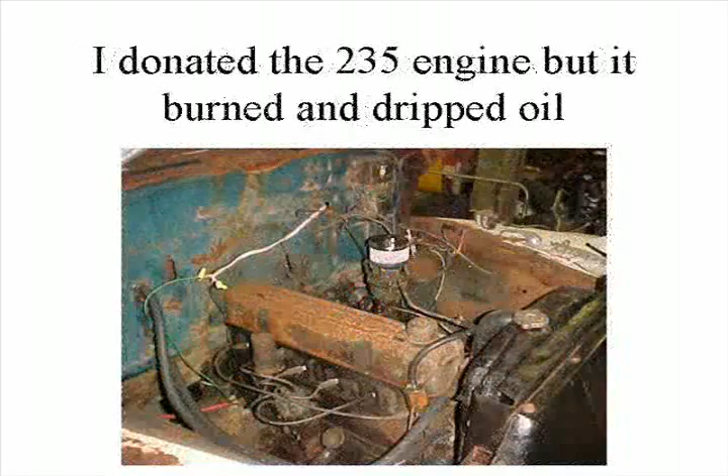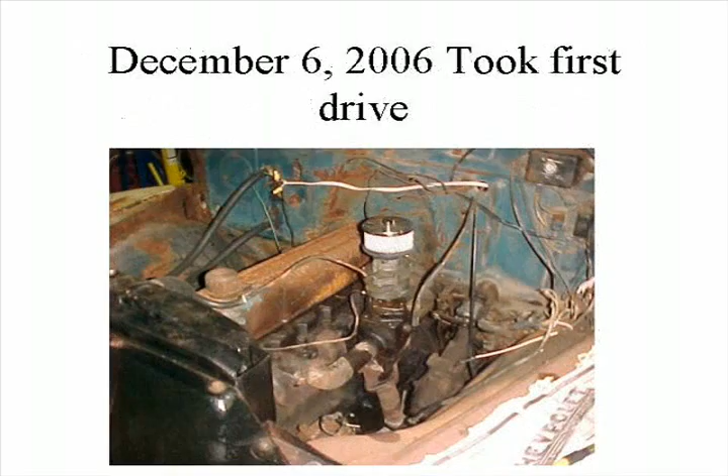This was about May of 2006 when we got started on this thing. We got it and dragged it home and started looking at it, and we found a whole lot of things wrong with it.

First thing we tried to do was get the hood up, but the hinges were rusted. Had to unbolt the hood hinges to get the hood off because they wouldn't open up. Anyways, got in there and found the engine was locked up, and that was a terrible mess.

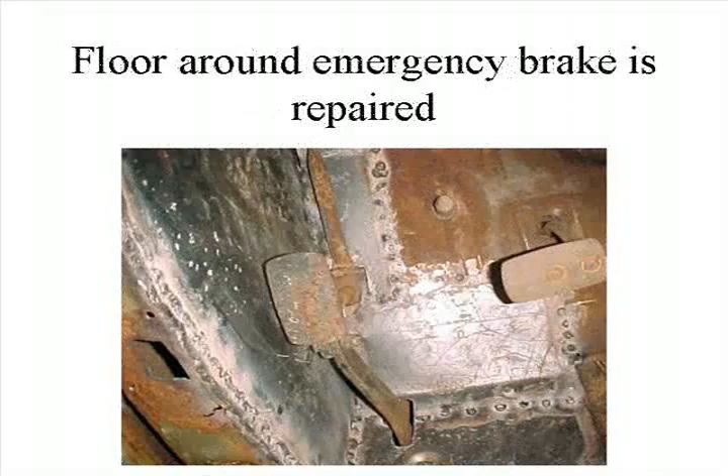I went around here in the backyard. I had an old 6-cylinder 235 engine. I got that and dug it out. It wasn't locked up, it used oil, but it ran. I figured we'd stick that in there so at least we could move the truck around while I was working on it.

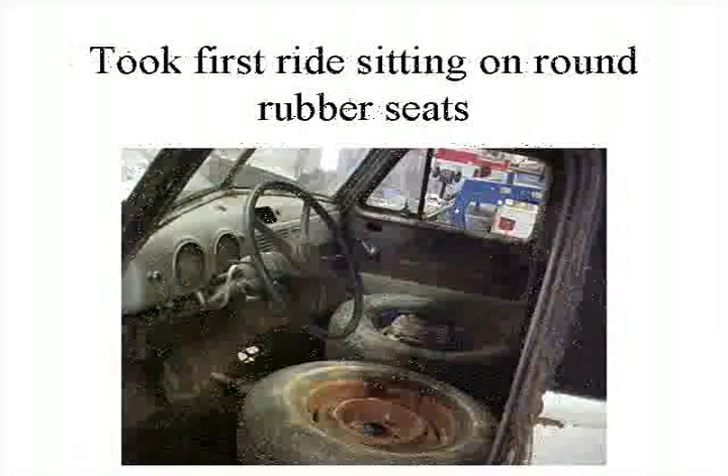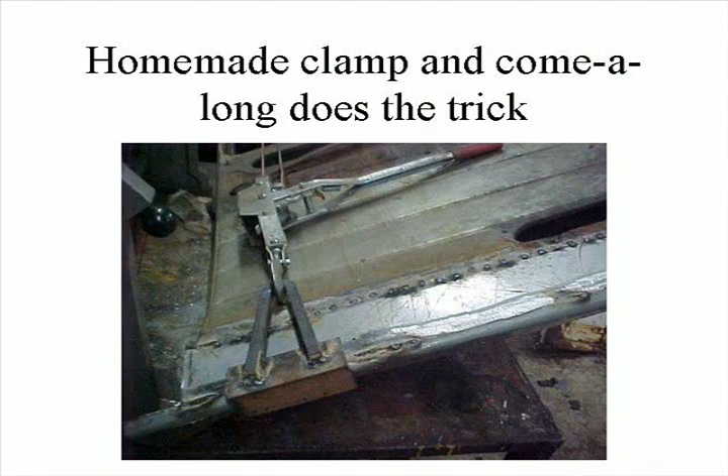So we fixed all that stuff and got the motor down in the thing. Then about that time I had a little medical problem, so the truck sat for a while. Anyways, we got back to it and got the carburetor all cleaned, and got an alternator stuck on the thing so it would keep the battery up.

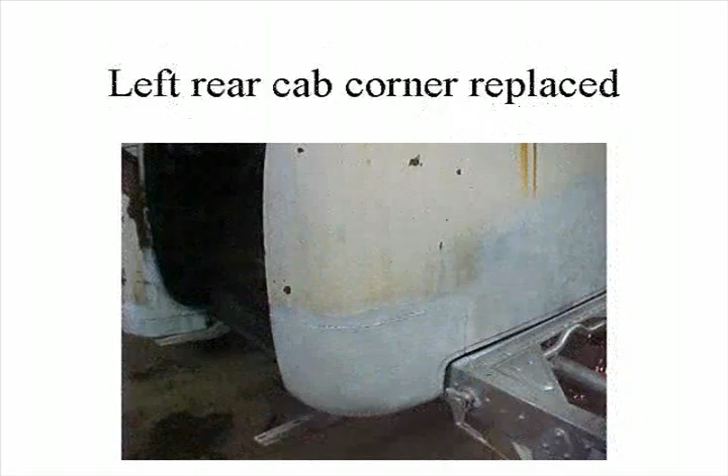When we got it home, we couldn't get the doors open, the locks were frozen up. Got the door open on the driver's side, and a mouse nest fell out of the bottom of the door. There actually wasn't any bottoms in the doors. The doors just rusted off completely.

Took a plasma cutter and leveled them off, welded the metal on the inside first, and then welded the metal on the outside, using a homemade jig to line the door skin up and got all that welded on there.

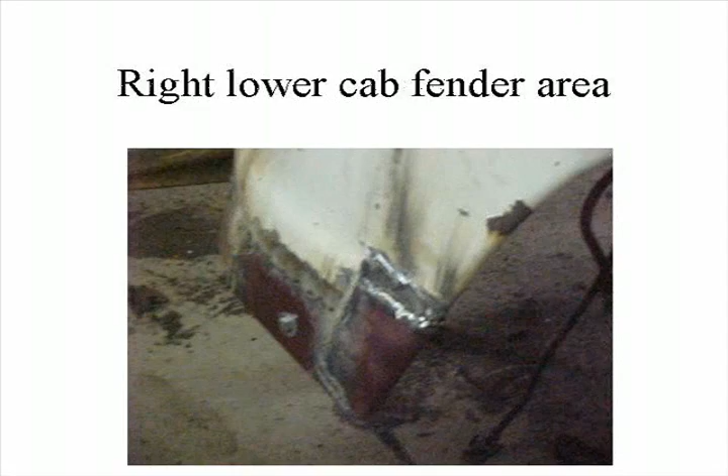Then we turned our attention to the bed and welded all the metal around the bed, and the front panel of the bed and the sides and all that.

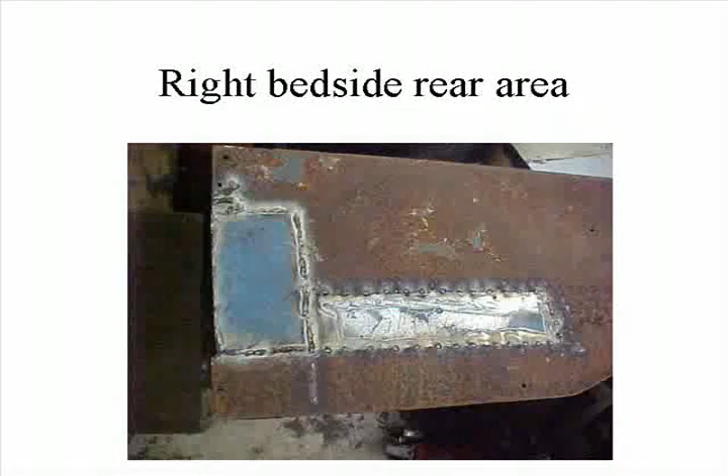Then I got all these 6 cherry boards from out of the backyard and milled them down with a planer, got them ready to put in that bed. Got them all varnished up, and man, did they ever look nice.

Got those stainless steel bed strips, bought them at the flea market for 15 bucks. Somebody didn't know what they were. Anyway, put them in that bed, and man, that thing looked nice.

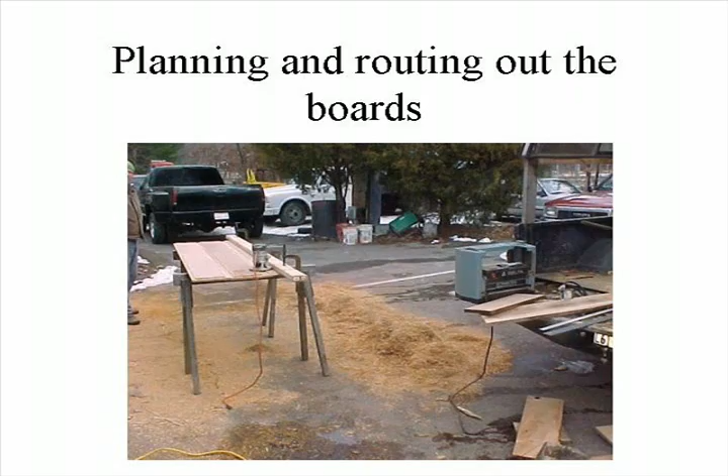Got the seat reupholstered and put an AM FM CD player in the thing. Got all the floor done, and got chrome wheels on the thing. That was one of the first things done. Had to put some tires on the thing to push it around, and the tires were flat.

So anyways, we got done on that thing in about 14 months, off and on, in the hospital and all. Got the truck done, and it runs nice. It's a good looking truck. A friend of mine has got the truck now, he just loves it, and he drives that thing as much as possible. So we got another one rescued that didn't go to China to make that damn mess.

So once again, we robbed the junkyard. What I was saying about melting it down for metal, taking it over there - China's got a great big project over there, a dam, and they're getting all this used metal and melting it down, but they didn't get this truck.

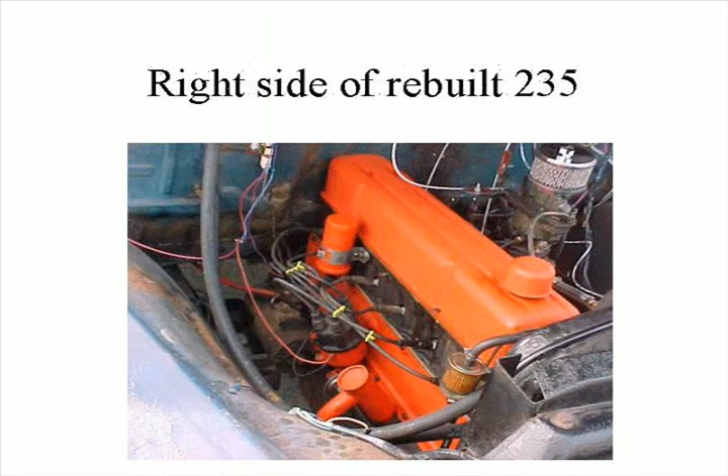We got this truck on the road, and it's got a couple of miles on it now. It's reliable, it runs. Oh, I had to overhaul the motor in the thing. We finally put rings and bearings and all that in. I spent one whole day yanking the head off and grinding the valves and doing all that work to the engine. But that made it reliable.

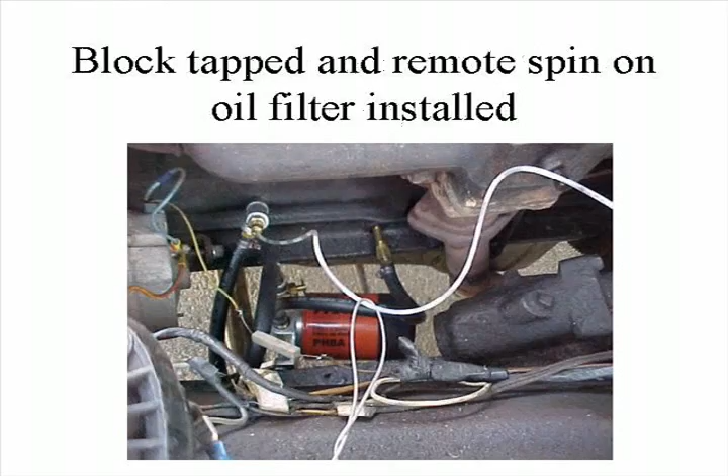She ain't dripping oil, she ain't leaking oil, and she ain't smoking out the tailpipe. So we got a good truck there, and we got done there in 2007. Nice, reliable truck, and it took a lot of work.